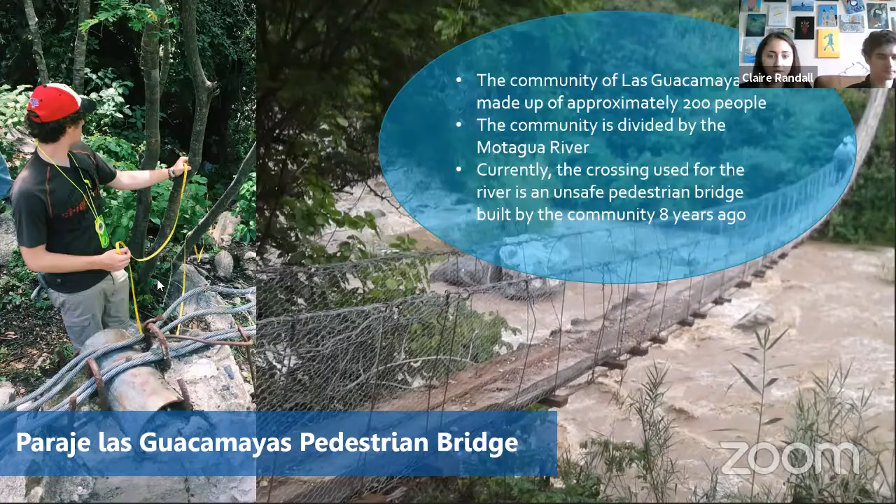So the bridge uses are generally for the community to either transport goods across the river or to get children to a nearby school. So it's used daily. And like Claire said, very unsafe. It's kind of hard to tell by this photo, but the railings actually are below your waist, which makes the existing bridge pretty daunting to cross. It's about 221 feet long.

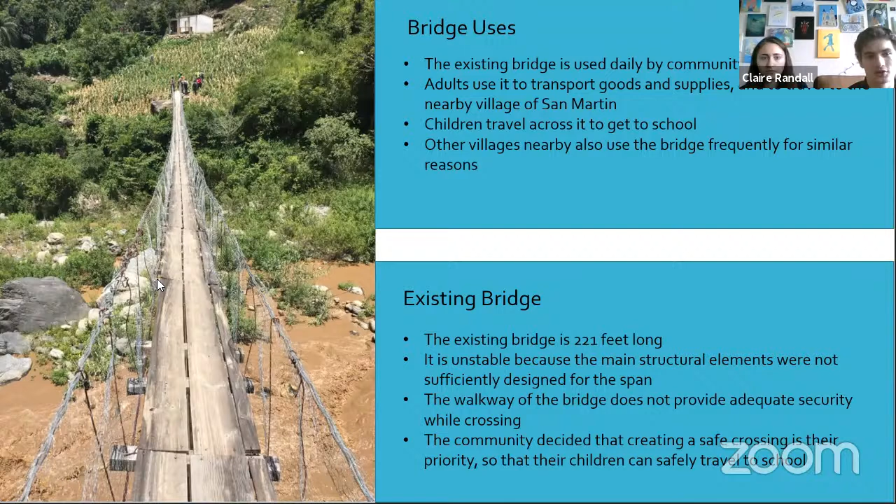And the lack of funds they had for the bridge led to a lot of the improper materials used. And you can see the shape that the bridge is in even closer here in this photo. And so our task is to build a bridge that gets rid of all of these issues, which are mainly issues of safety.

Okay, so the scope of our project is to replace the existing bridge with a cable suspended pedestrian bridge that the community will feel safe crossing. The proposed bridge is approximately 60 meters long, and it has been designed to be sturdy enough so that they can bring carts filled with goods across, and multiple people will be able to cross at once while still feeling safe. So basically just addressing all of those issues that exist with the current bridge, so that the new bridge will be better for the community.

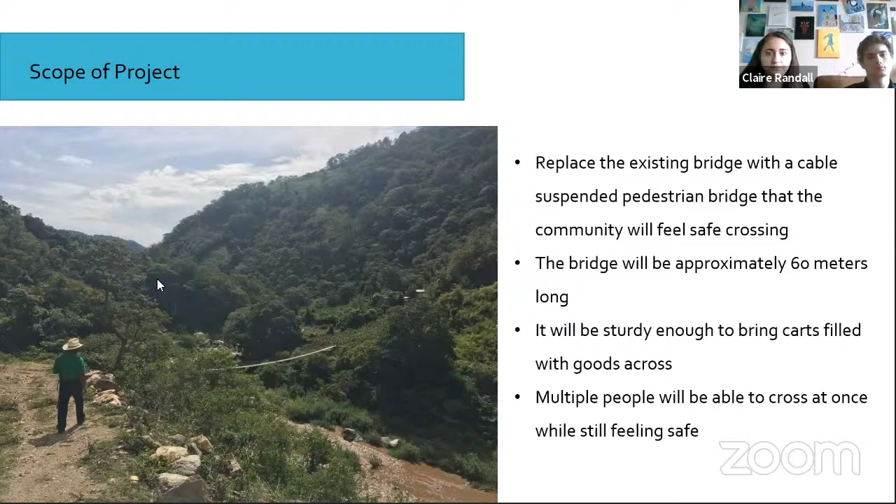So for the design process, as we mentioned earlier, we adopted this project in early 2019. And we actually went on our assessment trip in the summer of 2019. On that trip, we gathered all the necessary data, whether that was geotechnical data or cross-section data, and we'll show you some of the cross-sections that we developed based off of the data we took in country.

We estimated that the cost for the project is going to be around $29,000. That includes labor, because of the COVID delays and us not being able to be in country for part of the labor, so there's a bit more cost there. The duration is around 37 days, and that again is around the availability of some of the in-country engineers that work with the office.

And then we're currently planning a remote implementation. Hopefully within the next month or so is when they're gonna break ground. So we're pretty excited to hear back from them. We actually just sent down our first installment of money for the project.

And so as you can see this timeline, there's our July assessment trip. We did the alternatives analysis here at Marquette with our project team. This is all pre-COVID, so we were able to work with our in-person project team of around 35 students. And that was a great experience, and we got to do that for that whole year, 2019-2020 school year.

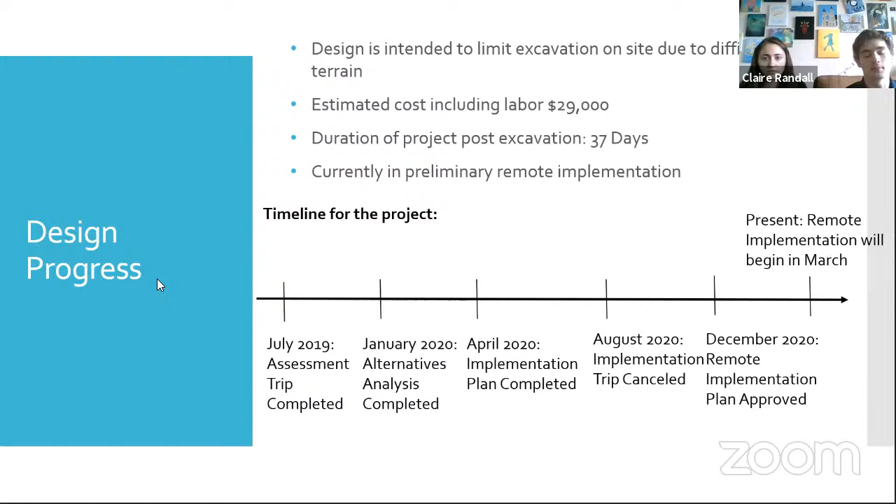The implementation plan was completed at the end of the 2020 school year, and then the implementation trip was canceled, obviously due to COVID, and since then, this project really slowed down in terms of the project timeline, because there was a long period of time where we were waiting to get approval for our design. And then present, we're now getting ready to finally implement, since we were finally approved in December of just this last year.

Okay, so getting into the bridge design itself. Our chapter actually uses the general design specifications from another nonprofit organization called Bridges to Prosperity, and that organization focuses just on building bridges in communities that need them. So they've basically come up with a really great resource on how to design these types of bridges. So we designed the cable suspended pedestrian bridge, and you can kind of see what that type of bridge looks like.

So our bridge was in soil conditions. So we have a gravity anchor, which is the type of abutment that you can see on the left of the image here. So the important aspects of a bridge are the abutment, which includes the tower and foundation, the gravity anchor beam, and this ramp, which you can obviously walk up to get to the bridge itself. And then there's the bridge walkway over the span itself, which will have the handrail cable and walkway decking.

And then another important aspect of it is the freeboard, which you can see here, which is the distance from the lowest part of the walkway to the high water line, which is important to design for so that the water never reaches the bridge itself, which would just be bad. It could damage the bridge and whatnot. Yeah, but that's basically an overview of what the bridge looks like.

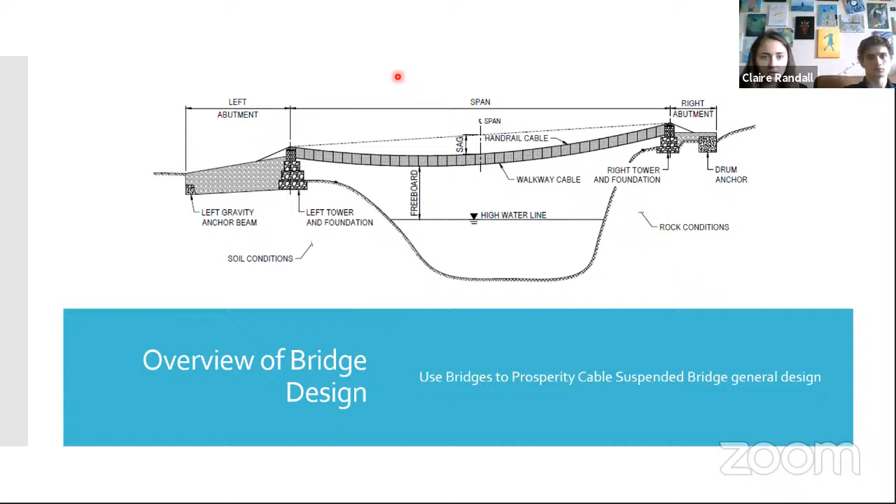Okay, and then here's a close-up zoom in on the abutment, which is important for a lot of our structural calculations. We have to design the dimensions of all of these different pieces of the abutment. So basically you've got the foundation, and then tiers on top of the foundation, which affects the height of the walkway itself. And then you've got your approach ramp, which is normally filled with stone or soil and a grout mixture. And then there's the anchor beam, which is the main force that counteracts the forces that are going across the bridge, like the loading on the bridge.

And the way that that works is there are cables that are suspended across the walkway that hold up the decking that people actually walk on. And then these cables go over the foundation and tiers and tower, and then they go back and they are connected to this anchor beam, which is literally just a concrete beam that is buried underground. So it acts as a giant counterweight essentially to the loading that is placed on the bridge.

And then another important factor is the handrail cable and the suspender fencing. So that's really important for the experience of crossing the bridge, so that one actually feels safe with a high enough handrail cable and a sturdy decking, so you're not worried about it breaking or anything. And that's actually something that EWB Marquette has implemented in our past bridge projects.

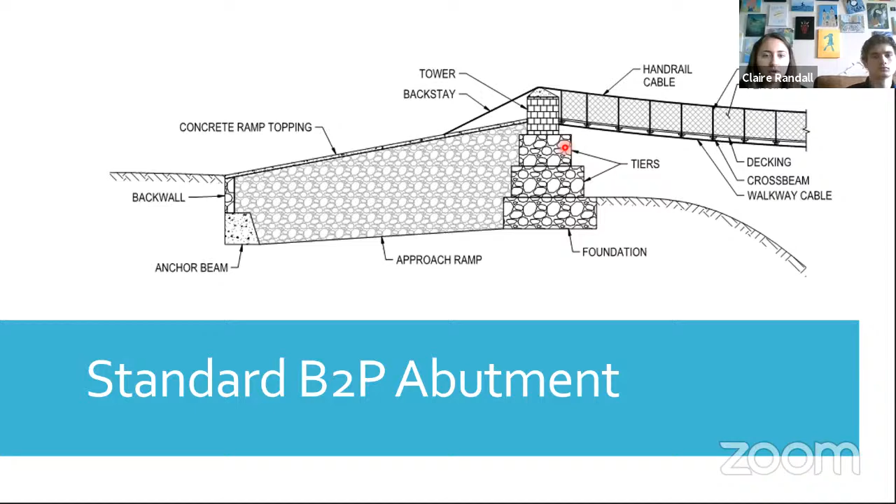We've decided that the standard that's given with the Bridges to Prosperity manual doesn't have a high enough handrail cable. So we normally add about one more layer of block to the tower. So that adds about 20 extra centimeters, so that you've got about a 20 centimeter higher handrail cable, which just really makes it feel safer when you're crossing the bridge, because you've got about 20 extra centimeters on either side of you to keep you safe as you're crossing the bridge. Yeah, that is the general makeup of what one of these bridges looks like.

So for our assessment trip, we briefly mentioned this earlier, we collected all of the technical and non-technical data. So that includes our cross sections, our soil data, but then also the non-technical data being questions for the community. And essentially all of those questions are based around making sure that our project meets their needs and how they want it to be.

So EWB really emphasizes with, not for, and that's kind of we build projects with the community, not for the community, right? So we don't just show up and build something we think is what they need. We work with the community and make sure everything they want this to be is what they get. And they have just as much stake in this project as anyone else, right? They are also part of the labor. They're also part of gathering materials. So this is their project.

And then the logistics of construction, that's also huge on the assessment trip. Just figuring out where we're going to have material laydowns, where we're going to store the material overnight, and things like that.

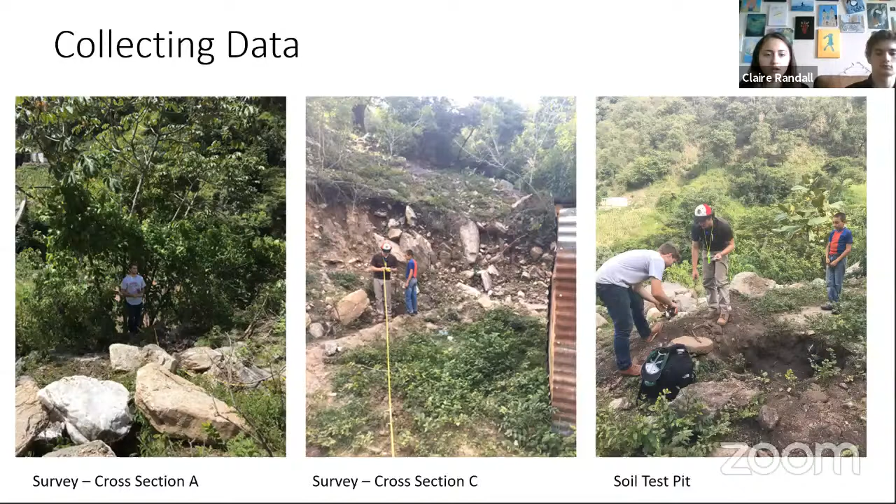And then I was personally in charge of copying down all of the data that we gathered on site. So this is a copy of what I wrote down when I was on site. So basically, this is the info that we got along with the soil test pit data. And this is kind of what we had to go off of when we were designing the bridge. So yeah, it's really important on these assessment trips that you get a lot of detailed information, and I didn't want to forget anything, so that's why I drew these little pictures over here so I wouldn't forget how the different cross sections were oriented to each other.

I took a lot of notes about different geographical elements that are around the cross sections. Like one has a lot of large rocks just behind it. Some of them had trees surrounding it that might need to be cut down if we did decide to construct the bridge there. And then this is all the actual data from the survey. So it includes the distances between all the survey points and then the angle of the slope.

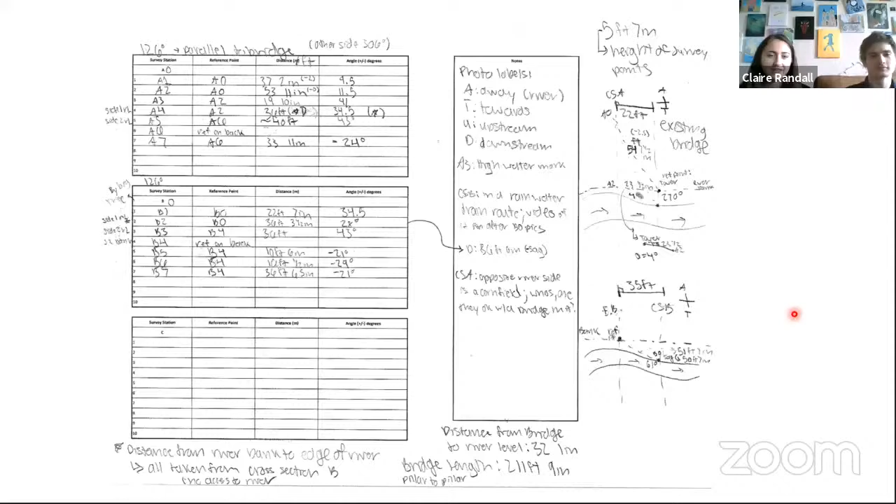So yeah, it's important to copy all this down and then make sure you understand it later. So I understood all this, but I know a lot of times when I was trying to work with our design team later, they had some trouble interpreting what I wrote down. So it's important to be able to remember the important data and then be able to communicate it to the rest of your design team.

So after our assessment trip, that's when the semester had begun, and we began our alternatives analysis with our project team. And how we approached that alternatives analysis was choosing which one of those cross sections of the river we wanted to build our bridge on, four different locations.

And so for each different alternative, we made a cross section, we evaluated capital costs, maintenance, the constructability at each of those locations, how the community felt about each of those locations, safety, material availability. Material availability and safety are kind of all the same between the different cross sections. It's more so the costs and design and constructability. And then expandability and scalability.

So all three, we kind of want to make sure that there could be future growth within the community. This generally applies to different types of projects mainly, as the bridge is probably not going to lead into a direct different type of project.

Although we've had in the past a community, El Aguacate, where we built a bridge for children, similar situations, children to get to school. And because of that increased level of students going to school, they actually needed a larger school. And that was the school project that we built a few years ago, a direct correlation with the bridge we built before that. So that's something to consider.

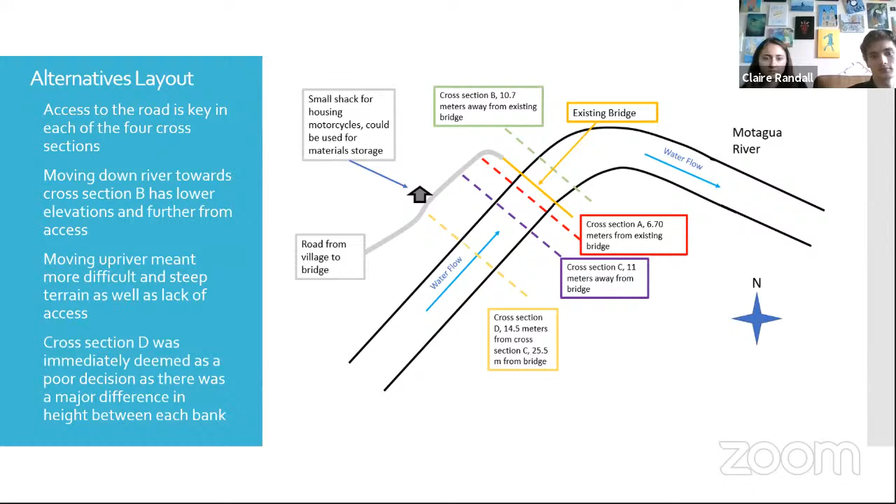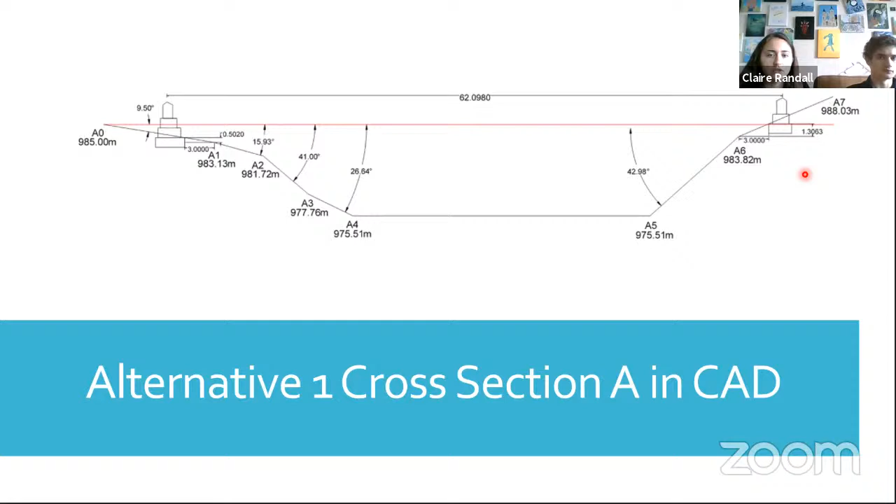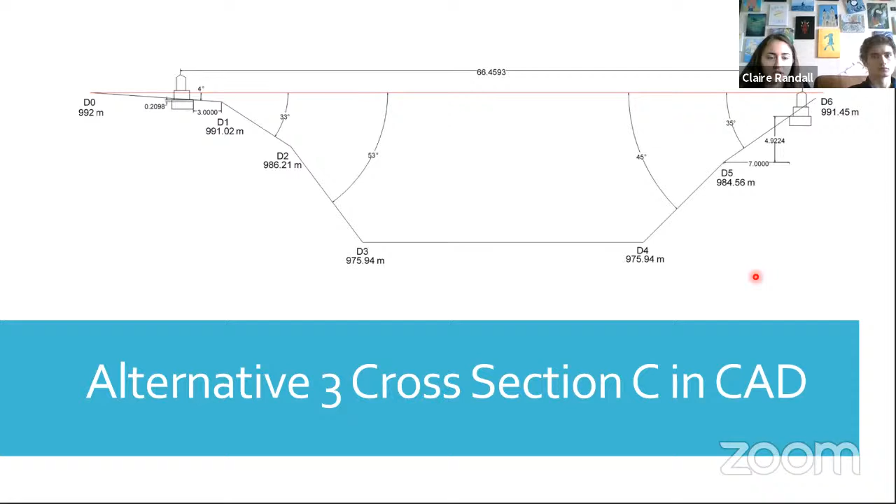And then finally, this was cross-section C. So again, a slightly bigger difference in height, and then also a slightly longer span. This one's about 66.4 meters.

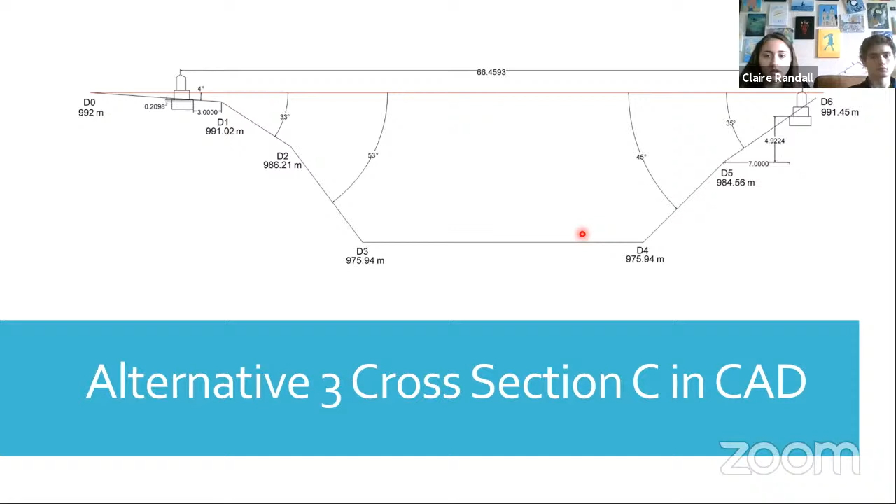So as part of the alternatives assessment, essentially to choose which one of the cross sections we're going to use, we developed a decision matrix. We've already mentioned a lot of the pros and cons to each of those 3, but it came out that alternative 1, or cross section A, just had the best scores on our decision matrix, and that's what we went on.

And so you can see some of the weights we gave the different items. We were talking earlier about how something like expandability wasn't going to have a whole lot of weight for this type of project, but the community input and constructability were going to be bigger things. And so alternative A ended up being our primary choice, and that's what we moved forward with for the rest of our design. And after the alternatives analysis was complete, we and the entire project team began going much more in depth on how the bridge was going to be designed, with calcs and everything.

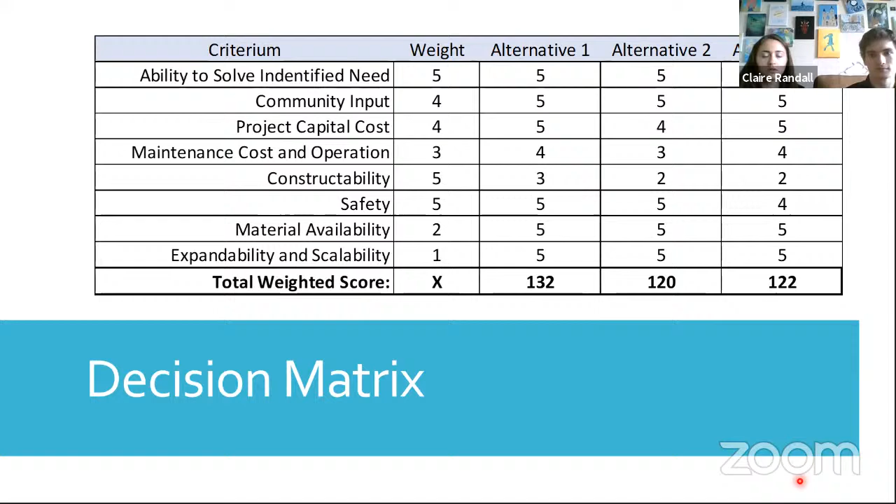So the implementation plan is the next set of paperwork after the alternatives analysis. And that's where we need all those more detailed calculations, the detailed drawings package. All the drawings we've shown you so far are actually directly from the Bridges to Prosperity manual. And so we need to adjust those drawings to, of course, all of our dimensions, do an accurate material quantity takeoff. We did that for each of the alternatives as well, but obviously we need to do that again with a new design.

Construction schedule, safety plan, and operations and maintenance manual. Some things like the safety plan and the maintenance manual are kind of generalized things that we use on a lot of our projects. So those aren't too different between the bridge versus like the school project. But obviously with the bridge project, there's certain like height protection limitations in the safety plan that need to be tossed in there and stuff like that. But that also kind of comes out of the Bridges to Prosperity manual, which has a list of those concerns.

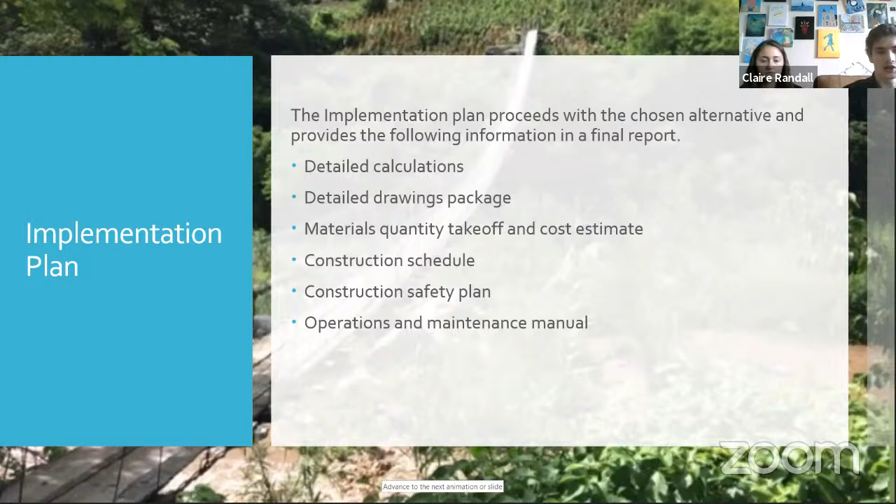So moving on and getting into our actual design. So for calculations, the 2 big things that we focus on are structural calculations and our hydraulics calculations. For the structural calculations, we go through the structural analysis of the bridge to ensure that it can withstand all of the loads that we expect to be going across it. In order to do this structural analysis, we use a program called MathCAD, which is actually a really great program to use. It's great because you can define all of your variables and give them a value, and then plug those variables into equations lower down in the MathCAD file and see basically what the result is.

So that's great because for the structural analysis, there are a lot of iterations of, you know, if we're not meeting a certain factor of safety, what happens if we increase the size of the foundation? So instead of going through and recalculating everything, all we would have to do is change the dimensions that we have defined for the foundation, and then MathCAD will recalculate everything for you, and then you can compare what that changes in all your calculations.

And so there are 4 main checkpoints for factor of safety in the structural analysis, and that's for overturning, sliding, uplift, and bearing pressure. So overturning would be like the abutment and tower itself overturning due to the moment about it. That one wasn't a huge issue for us for this bridge. It never really was a matter of concern because we always met that factor of safety.

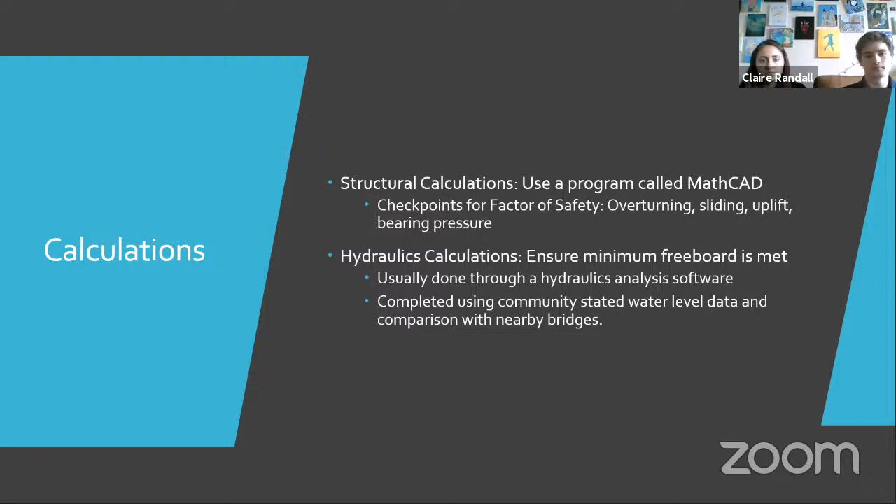And so, changes to our standard design. We've showed you some of the Bridges to Prosperity abutments and what they look like. Something that came up when we were designing our bridge was that constructability aspect, and mainly that has to do with our excavations. Both sides of our bridge essentially have really rough excavation areas.

The north side of the river has a lot of rocks and boulders in the way. So we, of course, want to minimize excavation there because we're not sure what we're going to run into when we start excavating. And we don't want to have to potentially move the bridge or have a major design change on site.

And then the other side has very few rocks. It's in this cornfield actually, but has such a high slope that we would just be excavating so much dirt. And in order to maintain a safe level of excavation, you can only excavate at a certain angle given the soil conditions. And so we would have had to excavate all the way up the mountainside.

And so we needed to figure out ways to really minimize the excavations, but that meant shrinking our abutments, which meant not meeting our factors of safety. And so that's when we reached out to our mentors and sat down and really had some big changes to our design. Some of our mentors had some great ideas when it came to changing the standard design of the manual in order to meet these difficult parameters we were faced with.

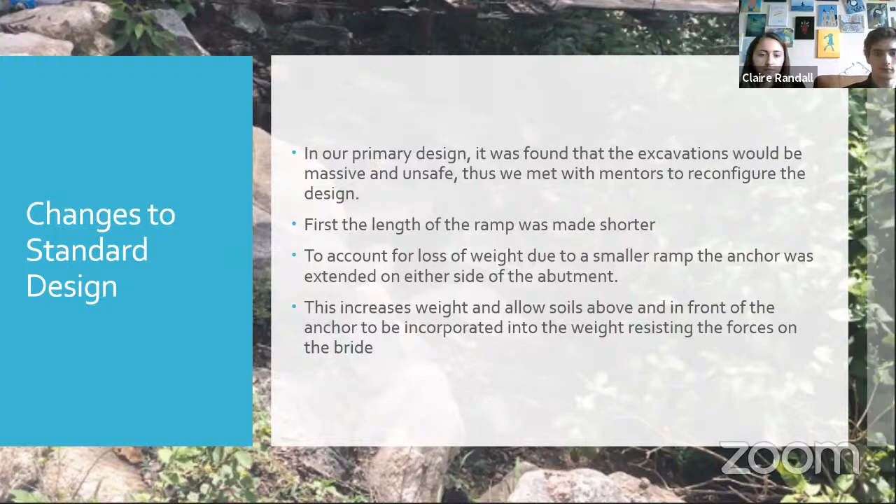Yeah, so this is our actual official drawing that was approved of one of the abutments. So like Matt was saying, this right here is our anchor. Standard Bridges to Prosperity design would be the anchor is the same width as the abutment. And you can see here that we've extended it.

So basically this will be buried underground, as you can see here. This is the anchor from the side view. So all of this soil that's in front of it will be the soil that's captured, and all of that weight is also going to be resisting the loads on the bridge.

And then one more thing that we also did to minimize excavations is we raised the anchor up. Usually an anchor is on par with the bottom of the foundation or even lower. So we raised it up to minimize this depth of excavation, which also messed with our factors of safety and meeting them, which is why we ended up extending the anchor.

But yeah, that's what our end result looked like after going through this iterative process of making sure that our structural analysis of the bridge worked. Right, and something to note as well is our design is actually still conservative. And while this capturing-the-soil kind of calculation we did is not something normal in the manual, our mentors wanted to make sure that our design was conservative enough that doing something outside of the manual wasn't going to cause a bridge failure in some way or another.

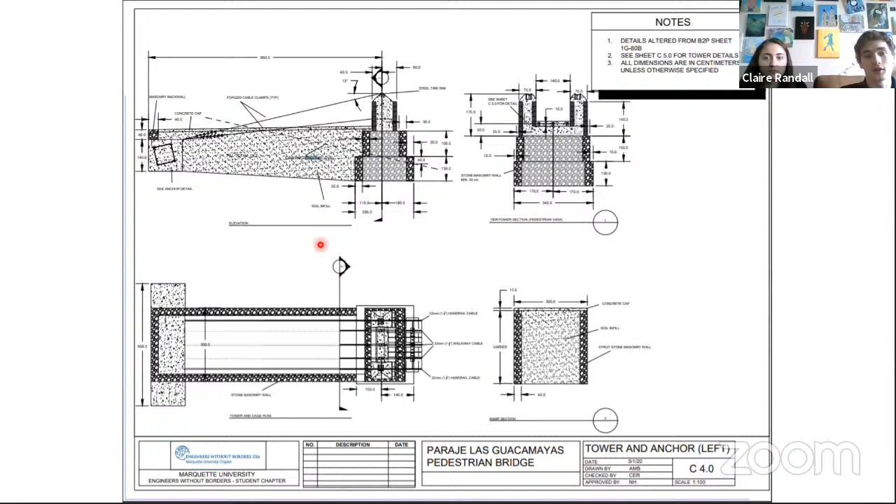And so not only is this capturing the soil directly in front of it, but because of the angle of soil friction, we're actually capturing cones of soil in front of the anchor. And we didn't even factor that in to some of our calculations. So our weight of the soil is actually less than it's actually going to be, meaning our design is still conservative to the point where there shouldn't be any sort of bridge failure. It's over designed.

So construction quantity takeoffs and estimates, that we did for the alternatives analysis, but then of course had to do again for this. This is pretty straightforward. We had a whole construction team working on our quantity takeoff. And so we divvied up the work, figuring out the different aggregate versus rock, cement, sand, all of that, most of which we had historical data on, our different ratios of sand to cement for projects done in Guatemala. And we followed those previous examples of bridges as well as other projects for making concrete.

As well as using data that we were given for unit prices. And so you can see in the background just a little bit of what our quantity estimate looks like. And we will also show you the quantity estimate if anyone asks. Essentially it's pretty straightforward. We did, of course, have to add labor, as we mentioned towards the beginning, because of the remote implementation, and the total cost came out to $29,000.

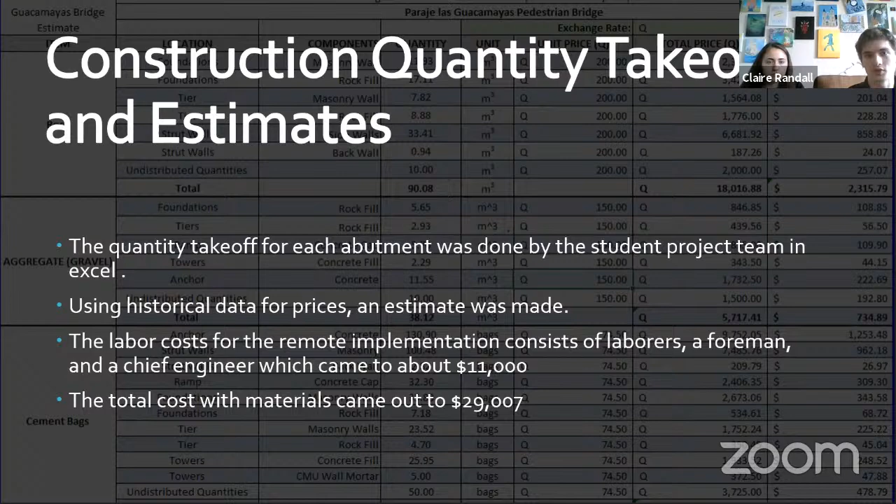And then a remote implementation. So the final step is implementing it, which is going to hopefully start soon. We actually had a pre-construction meeting with the Guatemala EWB office, and we met with the project manager, the mason that will be on site every day, as well as the engineer that will be going to site periodically to supervise and make sure that things are being built to our design specifications. So we'll be getting daily brief updates from that team. We're going to create a group chat so that they can ask us questions and we can stay updated on the progress of the construction.

And then certain milestones of the project we've identified will require more in-depth data to make sure that the bridge is being built to match the drawings, and if it's not, that we can check the calculations and make sure that it will still be safe. So there's 3 major milestones. That'll be measurements of the excavations to make sure that they're in the right location, they're the right size, that they're square to each other across the river. And then once that's done, they can move forward, and then we'll need measurements of the abutment. So make sure the foundations, the tiers, the length of the ramp is all as designed before the cable pull.

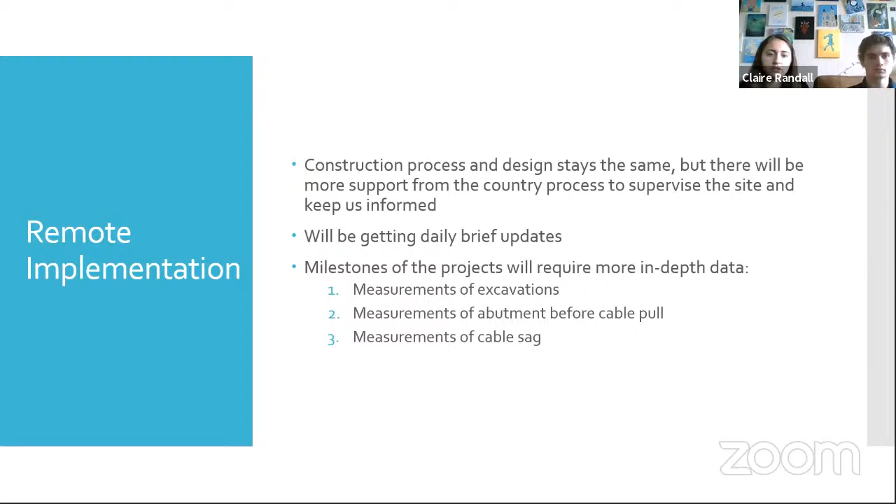So we also have, sorry. Go ahead, Matt. As for the questions, we have pretty much all of our detailed estimates as well as the calculations and things like that ready. So if any of you have questions regarding that, feel free to ask.

Dan has said he wants to learn to be an engineer now. He's at that point in his life.

So maybe you could talk a little bit about the loading of the bridge. So where did the amount of weight that the bridge would have to support from a live load standpoint, what drives that calculation? And I'll let you answer that, and then I have another one after that.

Okay, yeah, so that's a design criteria that the Bridges to Prosperity manual actually sets. The loading on it is actually way higher than the loading would ever actually be on the bridge. So it's a very conservative design because they design it as a fully loaded bridge. So imagine the entire bridge is filled up with carts full of goods or cattle or something.

And I used to know this, but I can't remember off the top of my head what that number is, but it's a very high per square foot loading number. And yeah, so that comes from the Bridges to Prosperity manual, that design criteria.